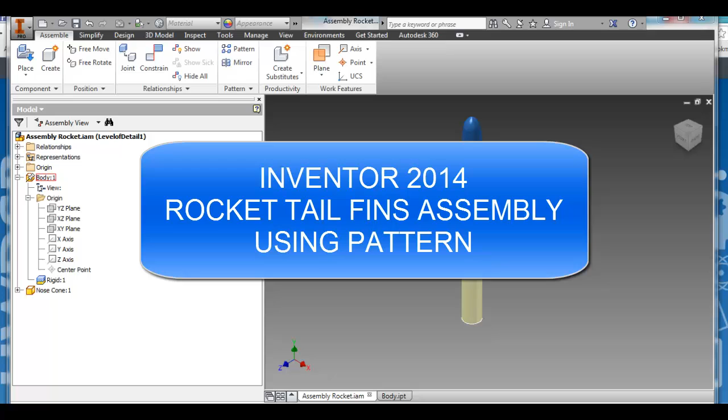Okay, when you're creating the assembly for the rocket, you're going to need to put in the nose cone, the body. I would make the body be grounded, and then we need to put in the tail fins. To put in the tail fins, what you should do is just put in one tail fin, and then you'll use this feature up here called pattern to create the other tail fins in an array around the rocket body.

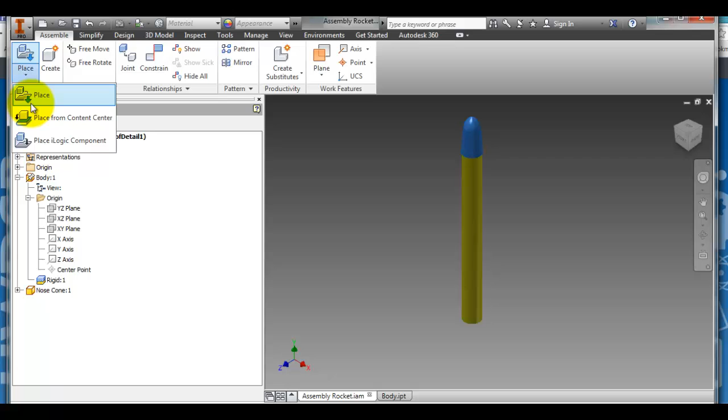So to begin with, I'm going to place in the tail fin, and as I said, I'm just going to place in one. So I'm going to place it over in here, and then I'll escape. Now what I want to do is to mate the tail fin in such a way that I will get it located on one surface of the body of the rocket.

So to do that, there's many ways. You could come up with all sorts of different ways to do that, and the main thing is to think of how you want to locate this and what you can use as reference points. So what I'm going to do to begin with, I'll show you one way to do it.

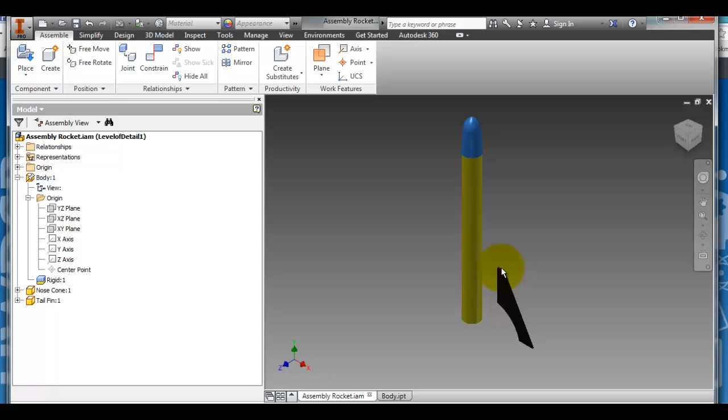I'm going to put the tail fin aligned with the center of the rocket, and then once I've got that, then I could offset it out by the radius of the rocket body, and then I can mate the top of the tail fin here to the bottom of the rocket and offset it up so that I know exactly where it is there as well. And that should be probably enough to be able to have it located the way I want it.

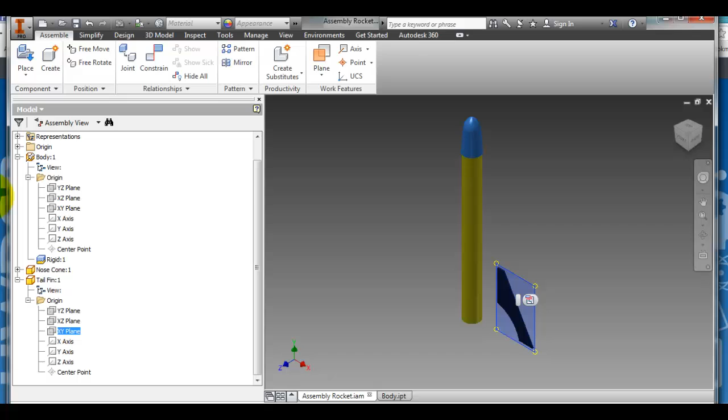So to begin with, I'm going to go to the tail fin over in the tree. I'm going to go to the XY plane of the body, and I'm going to mate that to the XY plane in the body. Sorry. So it's the XY plane in the tail fin to the XY plane in the body.

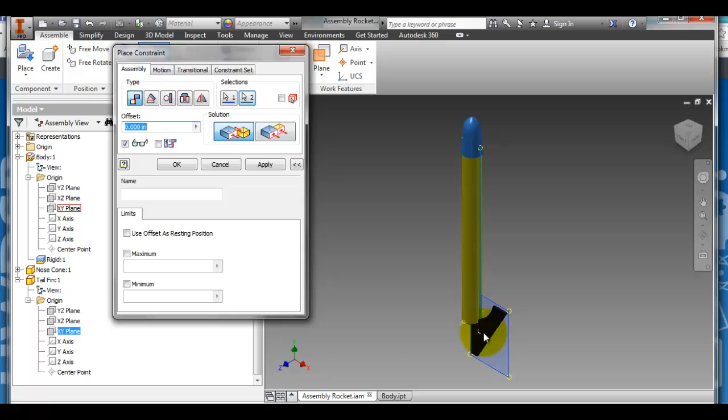So I'm going to constrain. I've already got this one selected, so it moves to the second selection. And so now I'm going to mate it to the XY plane, and it flipped upside down. I just need to click on the flush one here, and now I've got that applied.

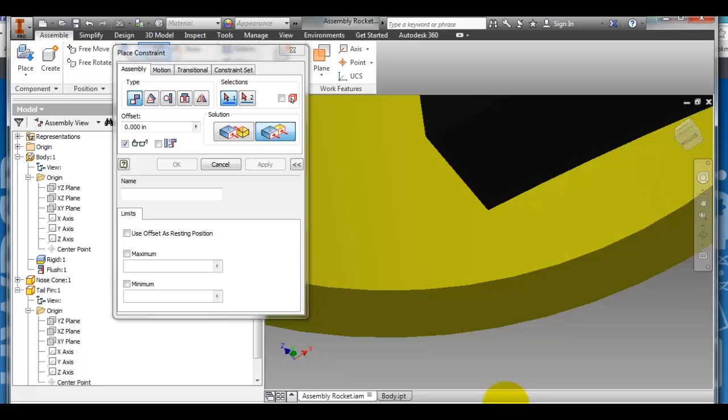So now I'm going to say OK, or apply it, and I'm going to look at the bottom of the rocket now. And it looks pretty good, except for that it's inside the body of the rocket. So what I'm going to do now is I'm going to create another mate. I need to spin this around just a little bit more so that I can see it better. Out.

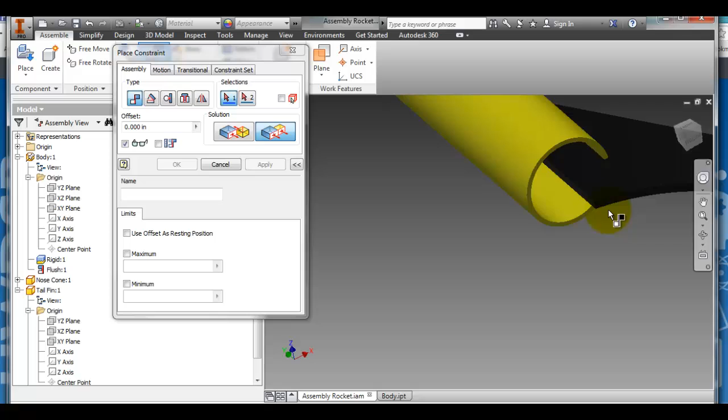So I get this around enough that you can actually use the free rotate over in here. You may find that easier to move things around. But now I'm going to mate this end surface. I'm going to take that and mate it to the YZ plane of the body. So I'm going to take the body, I'm going to go to the YZ plane,

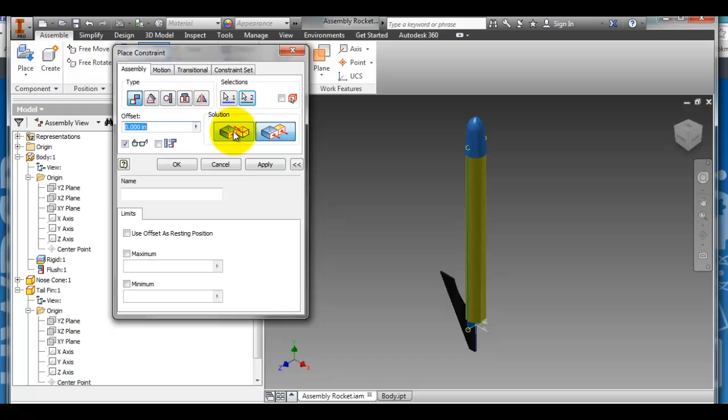and again I'm going to do flush, or not flush, mate, and then now, again, I'm going to look at the body, and now it's exactly in the middle of the body of the rocket, which is not quite what I want. I want it to be offset out 5/8 of an inch. The reason it's 5/8 of an inch is I made the body of the rocket 1 1/4 inch outer diameter, so half of that is 5/8.

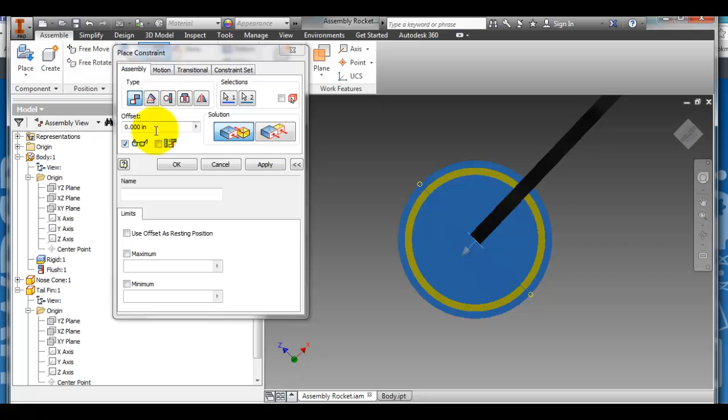So really, 1 1/4 is the same as 5/4. Half of that is 5/8. So I'm going to put in an offset up in the window here and make it 5/8. Say apply, and now I can see that it's exactly where I want it. So now I can go back to the home.

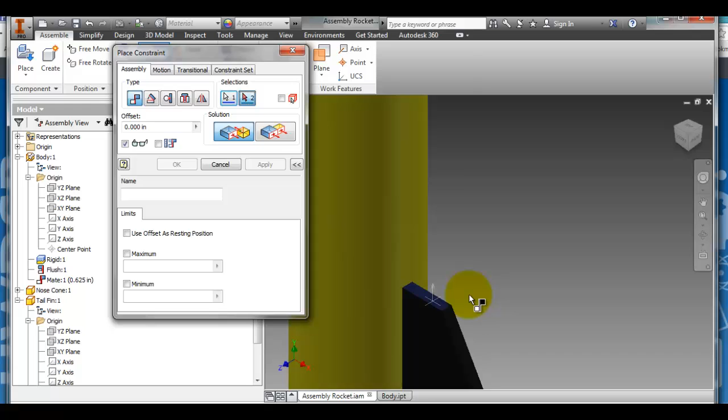Now what I need to do is to get it located up and down. So I'm going to zoom in here, and I'm going to take this top surface, and I'm going to mate it to, again, there's many different ways you can go about doing this, but I'm going to mate it to the bottom surface of the rocket. I'm going to go here, and there's the bottom surface of the rocket.

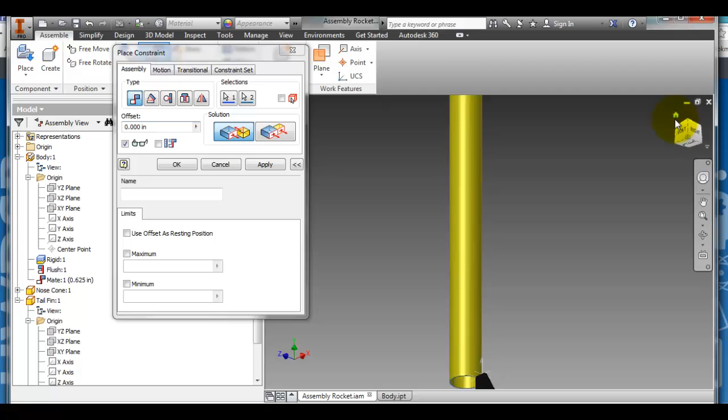Now again, if I look at it, that's not what I want. I want this to be further up. I know that I made this 2.5, and for my purposes, I've decided I want this point here to be right at the bottom of the body of the rocket. So since I've made this 2.5, I'm going to offset this 2.5. So I type in 2.5. Watch what happens, it actually goes down. The positive makes it go down.

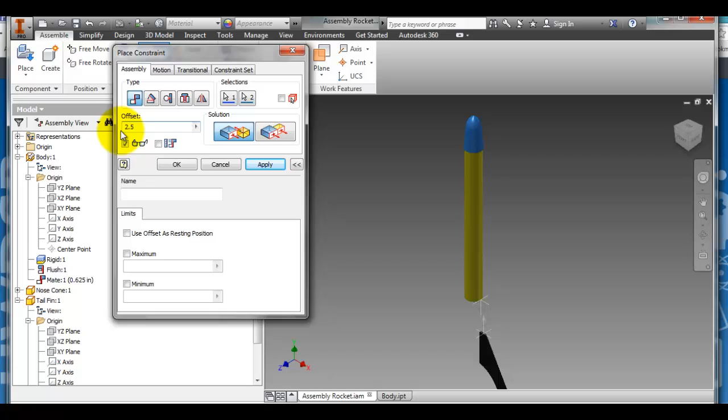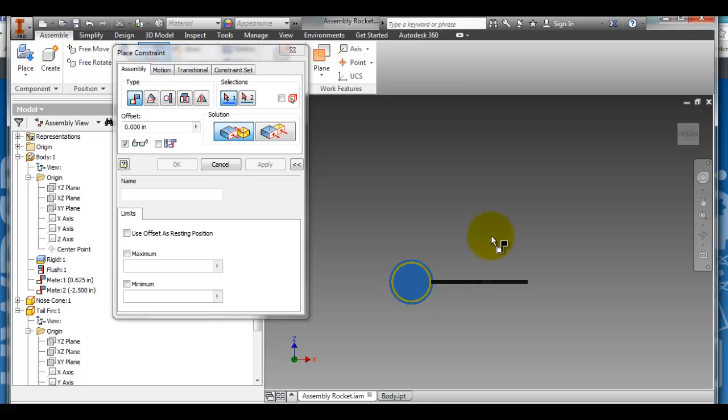So I'm going to type in negative. The nice thing is it shows me it as I go along, so I can just watch as I do it, and if it's gone the wrong direction, I can type in a negative. So now I can say apply, and again, if I look at the bottom of the rocket, now I've got it exactly the way I want. It's at 90 degrees, and it's on the surface of the body of the rocket, and also it is located in the vertical direction where I want it.

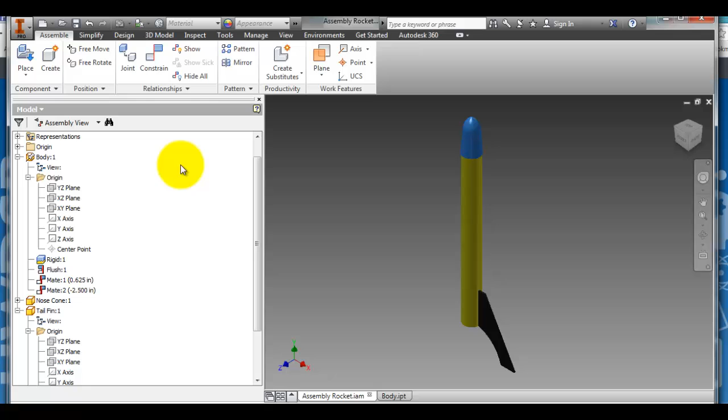So now I'm done with the one tail fin. So I'm going to close my constraint window, and now the last thing I need to do is to use this pattern. So I'm going to click on pattern. I actually find it easier to click on the part first. So now I've selected that part, so that's what I'm going to pattern. I go into the pattern window, and I'm going to select circular pattern.

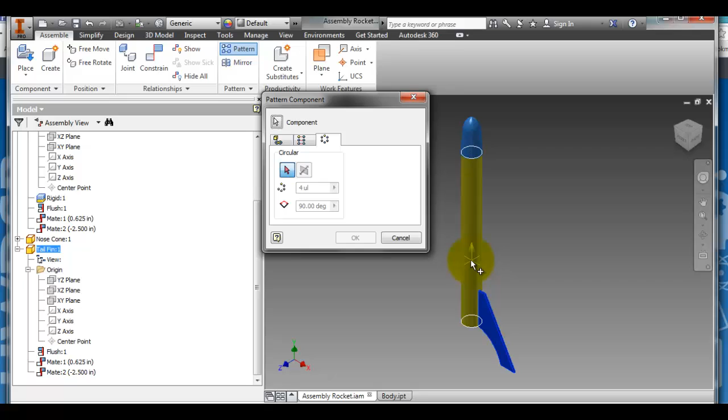And then now what I need to do is to identify the axis that it's going to array around. And if I go over the body of the vehicle, I get this axis in here, and that's exactly what I want, which is really the center of the body of the vehicle. Now look, it's put four of them going around, and so it's defaulted to four at 90 degrees. That's the angle in between each one. And so if I take a look at it from the top, it looks really good, right?

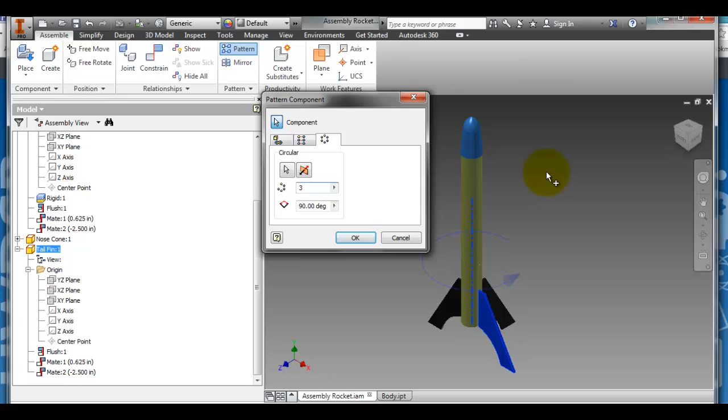I've decided I only want three tail fins, so I change this to three. However, now if I do that and I look at it from the top, I've only got three tail fins because the angle between is still at 90 degrees. So what I need to do is change the angle here. 360 degrees divided by 3 is going to mean 120 degrees is the angle between. And now when I take a look at this, it looks perfect.

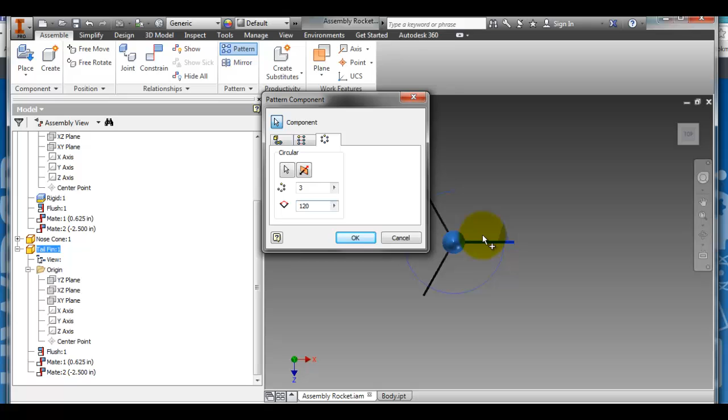So now I can say OK, and I can go back to home, and I'll just rotate it around a little bit, and there's my rocket with the three tail fins. And so that's how to go about putting your tail fins into the rocket assembly using mates.